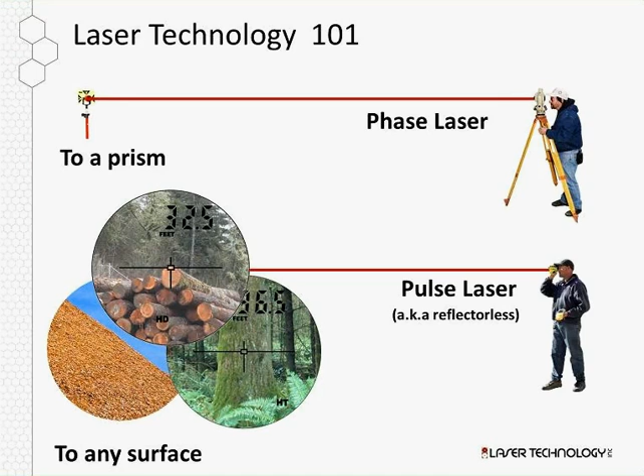We incorporate this in our laser rangefinders. We've got a distance sensor built in and a tilt sensor in a TruPulse 200 model here. The distance sensor measures that slope distance or line of sight distance. And the tilt sensor measures the inclination or tilt of the unit itself. With those 2 values, we're able to calculate the vertical distance and the horizontal distance that's used mainly in mapping applications.

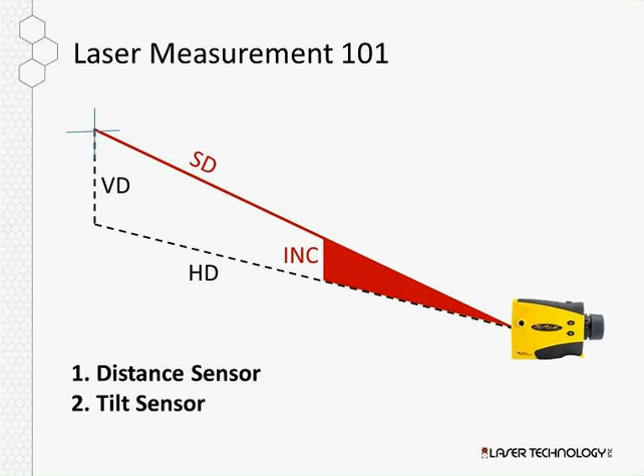Taking it a step further, we incorporated a compass sensor along with those other 2 sensors, the distance sensor and tilt sensor. The compass sensor works off of magnetic north, and so with those 3 values, we're able to get the slope distance, inclination, and azimuth or bearing values, so we're able to calculate that XYZ value.

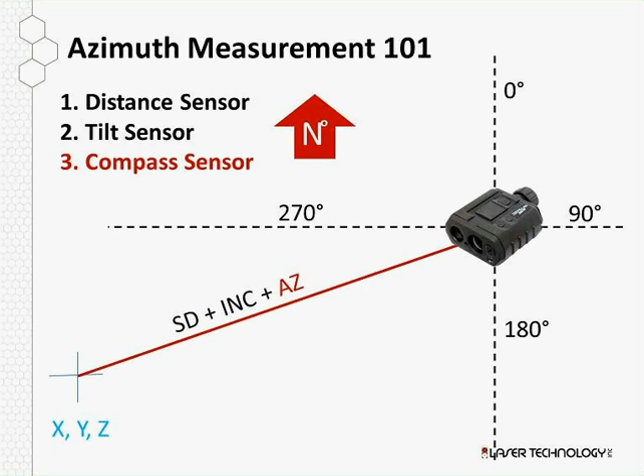In case you encounter magnetic interference or work around heavy machinery, a compass can be compromised. So we developed a horizontal angle sensor, the TruAngle. Now, taking our TruPulse 200 that measures slope distance and inclination, the horizontal angle sensor will measure the turned angle. You've got to establish a 0 reference. So taking the values of slope distance, inclination, and the angle value, we're able to calculate the X, Y, Z coordinates of your object.

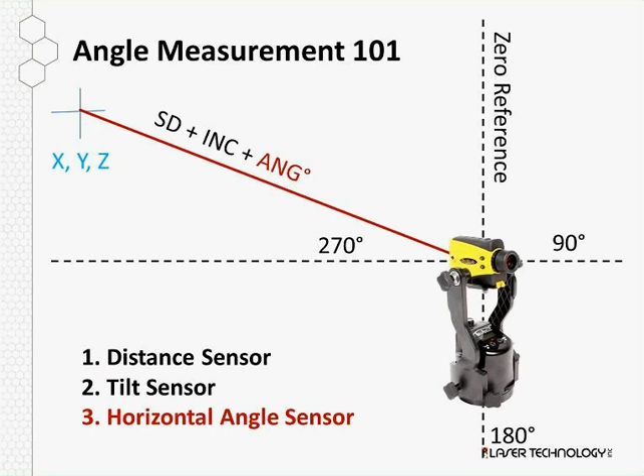Scott, could you talk a little bit more about Juniper Systems itself? Absolutely. The parent company of Juniper Systems is Campbell Scientific, and you may recognize them. They're one of the top manufacturers of stationary data loggers and data acquisition systems. In the late 80s, one of the Campbell brothers, Ron Campbell, branched out and started making rugged handheld computers. One of our first customers was actually a log scaling type customer, and we officially took on the name of Juniper Systems in 1993.

And Juniper Systems conjures up some images. Most people, when they think of Juniper Systems, they think of some of the videos we've made showing handhelds being shot from slingshots or dropped off roofs or thrown into lakes, even put under a truck or sealed in concrete. That's really our specialty, making the world's most rugged and professional industrial-grade handhelds.

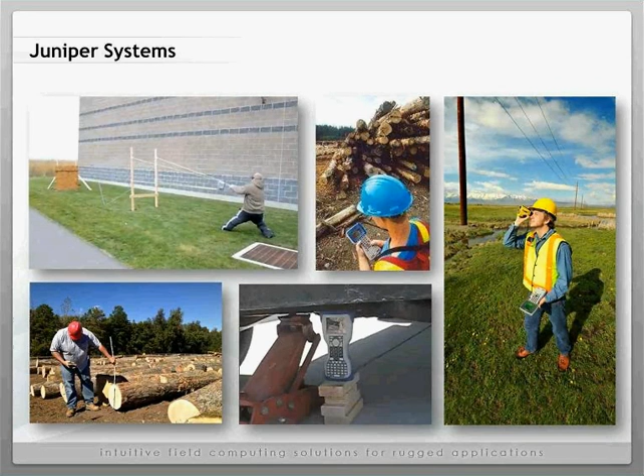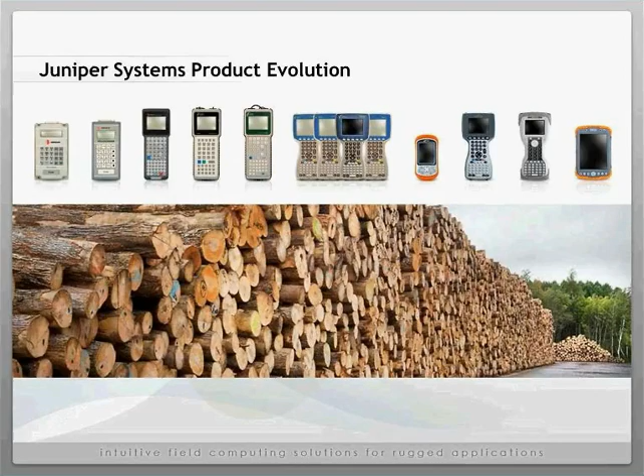This kind of shows the product evolution. Our products have changed a little bit in the last 20 years, and what's interesting is how many of the previous products are still going strong in the field. This is our current product line. Each handheld caters to different preferences, but they follow the same theme of being rugged and reliable, and they're each waterproof, dustproof. They're built to perform optimally in real world conditions, and each will work seamlessly with Laser Technology products.

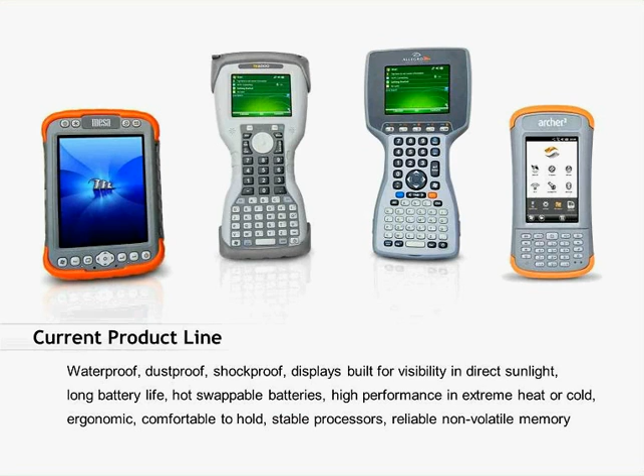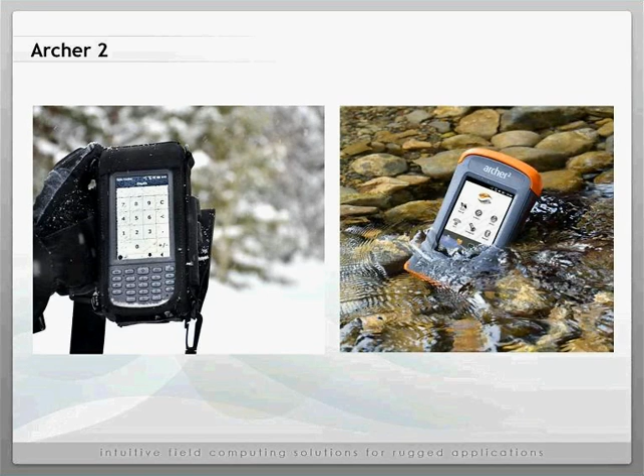So the Archer 2, like other Juniper Systems products, offers maximum data protection. It's got the IP68 rating, MIL standards, so it's going to be waterproof, dustproof, built to endure and perform in any conditions. The display is the first thing that grabs people's attention. We took the best screen available and used a special optical bonding process together with chemically strengthened glass, and the result is a screen that's virtually scratch-proof. It has incredible brightness in any conditions.

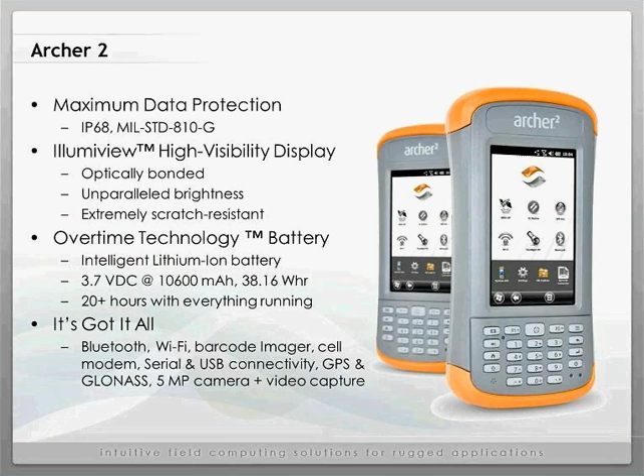And along with that, the battery power is outstanding. It has a lithium-ion battery that's 2.5 times more powerful than our previous products. So with the screen at full brightness and other power-hungry applications like GPS going, it'll go for 20 hours, no problem. And lastly, it's got it all, because there's a wide variety of configuration options available for the Archer 2. I also wanted to comment that Juniper Systems and Laser Technology have been used hand in hand for a long time, and the products complement each other very well.

Well, thanks, Scott. And John, how did you get involved with Juniper Systems and also Laser Technology? Well, log decks are so large and misunderstood that it's difficult for folks to get involved. I discovered there was really a limited number of folks willing to step into this adventure. I didn't supply this slide, but it happens to be Weyerhaeuser Longview, where my wife and I first started our scaling career in 1976. When I left the Scaling Bureau and went to work for Simpson Lumber, we had our crane issues up in Tacoma.

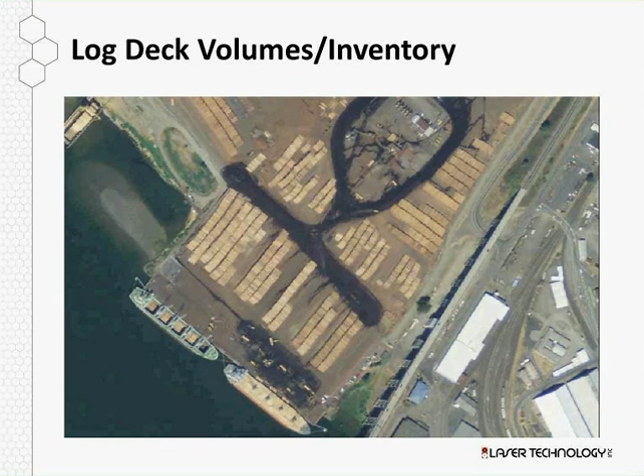Next slide. We were trying to figure out the best method to measure these high decks, and the problem was getting around in between the decks. This top slide shows a dramatic squeeze to emphasize how difficult this was, a technique I also used for my log quality pictures. But my first experience with laser tech was actually on a crane in Tacoma. The old method was measuring log decks with a 50-foot pole, but the decks were 55 feet high. It was impossible to do this on a regular basis, so it was only really done at audit time.

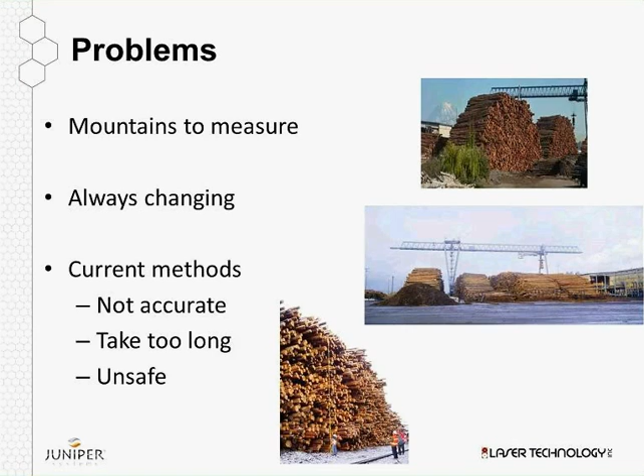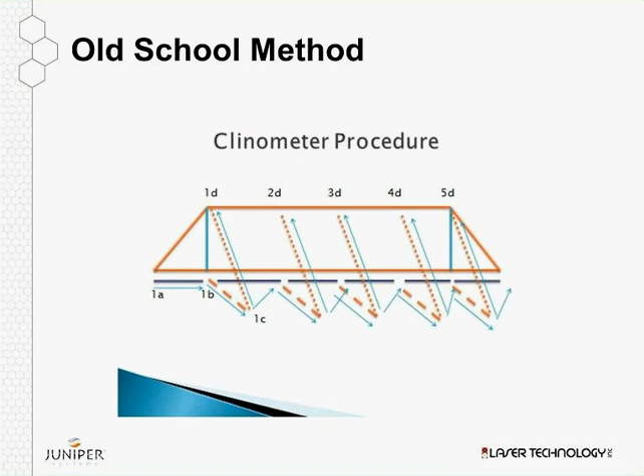So the method I came up with was something we all learned back in forestry school, using a clinometer with a 50-foot Spencer tape. We developed a procedure so one person could walk down a log deck, take shots, and get a higher degree of accuracy. The problem was that after all the measurements, only half the work was done, and with the inaccessibility of many of the decks, after spending so much time to get the best information you could, you were ending up guessing at many of the other log decks.

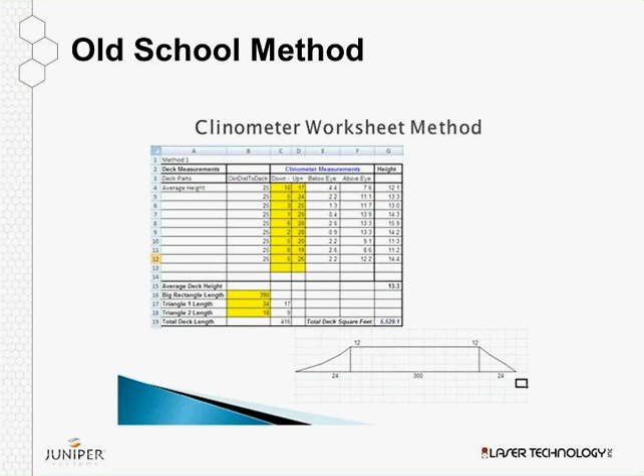So the goal was, because of my experience of riding our crane with a TruPulse 200 tethered to a scaling computer, I had gained the knowledge at least to ask the right questions and went on a letter writing campaign. Laser Tech came through with the programming of the log deck software, which I enjoyed immensely working with these folks and their programmers. And Juniper had the scaling computer that I needed for my check scaling, which just happens to have become the kind of standard de facto here in the Northwest for all the scalers. Just about everybody's holding one of these devices.

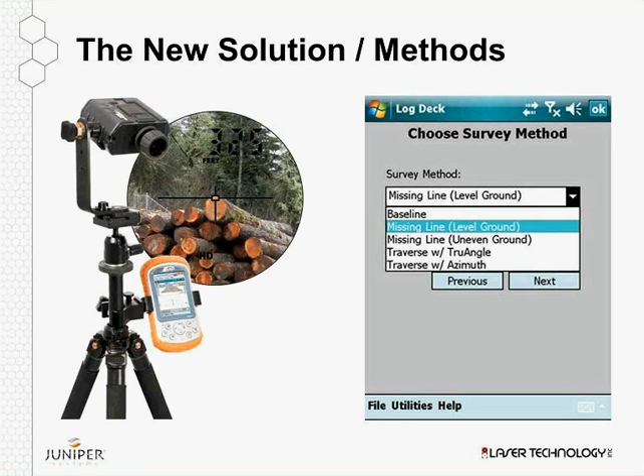Yeah, so working with you, John, we wanted to make sure we capitalize on all the goals and your procedures that you had out in the field, and so we developed a software solution called Log Deck Volume. And again, listening to the customers and the issues you've seen out in the field, we wanted to develop a simple way to collect the data with our laser rangefinder on top of a Juniper Systems product. So we developed 5 different mapping methods. You have all different types of applications or environments in the field, so we developed these 5 different mapping methods.

This first method is the baseline method. That's more of a simple method. A user is going to set up an origin, maybe set a cone, the traffic cone there at one end of the log deck, away from the deck. And what you're going to do is you're going to work along parallel the length of the log deck using the laser rangefinder and the software. And you start to walk along that baseline until you see a break or a peak and valley of the deck itself, the top of the deck.

And you take a measurement to the origin, then you're going to take a measurement to the top of the deck. Then you're going to move to the next break or valley. You take a measurement to the origin and take a measurement back to the top of the deck. And you work your way to the length of the deck and take that last measurement back to the origin. The software, as you can see here, there's just a quick screenshot, walks you through everything. So it knows you're taking those measurements correctly, back to the origin and then the top of the deck. It's one of the simple methods using a TruPulse 200 product.

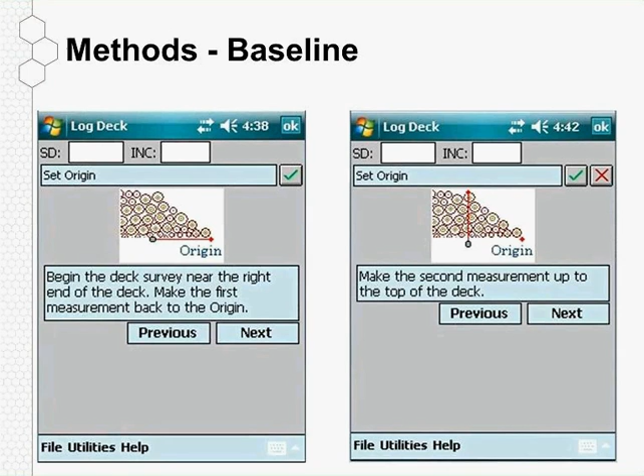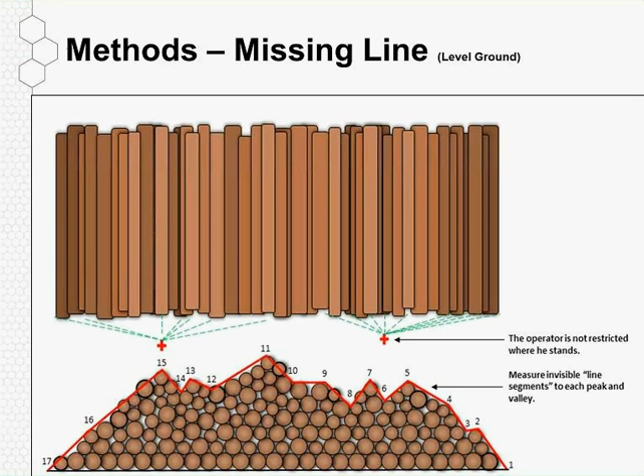The other method we developed is called missing line. We have a routine in the TruPulse 360 product called missing line, where you can take a measurement to 2 remote points, and it'll calculate that line segment between those 2 remote points. And this is if you're on level ground. You establish a position safe away from the deck, and you're going to use the TruPulse 360 in the missing line method. You take a measurement, so we're doing these little line segments from 1 to 2, 2 to 3, 3 to 4, and the software will capture all those different line segments. Again, you can see it drawn, the quick diagram here, and the software walks you through there, taking those missing line segments.

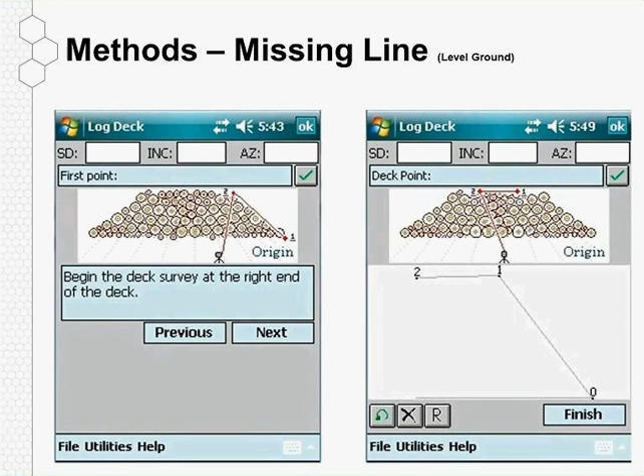That's if you're on level ground. We all know a lot of mill yards and areas aren't on even ground or level ground, so we needed to develop a procedure for uneven ground. This still utilizes the TruPulse 360 product and that missing line method I was talking about. A next step is taking that missing line segment. You're going to go from 1 to 2, and then you're going to need to take a missing line segment from 2 to the base.

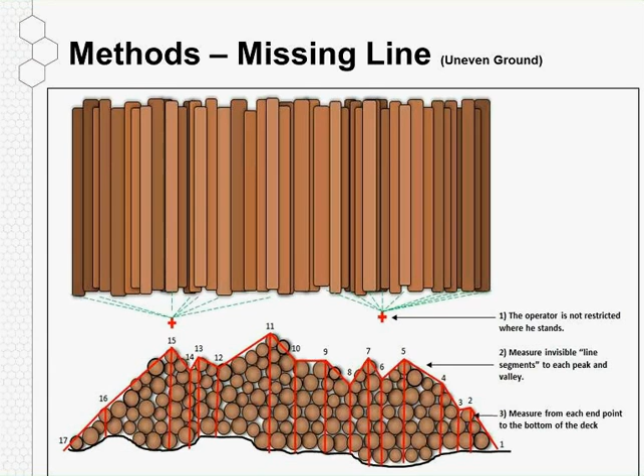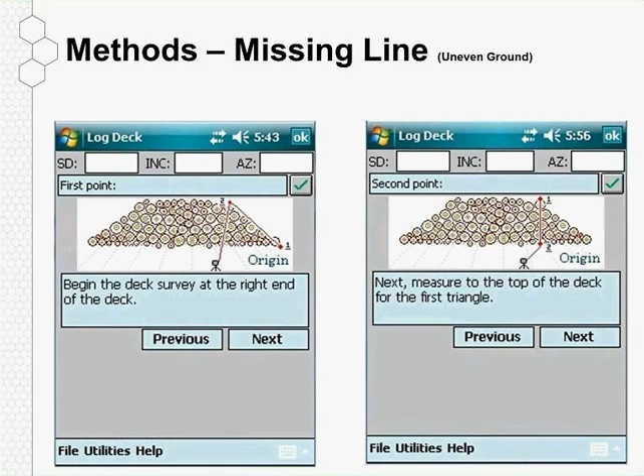You need to be aware of where you're taking those measurements, to the top of the deck and to the base of the deck. And then you're going to take your next measurement line segments from point number 2 to point number 3, and then from 3 to the ground. And you continue this along the deck, getting all the peaks and valleys of the log deck, and work your way to the other end of the log deck. The software, quick screenshot showing you the next steps, what you need to do, taking measurements from the origin to the first peak or valley, and then taking from that top portion of the deck to the base.

The next method is traverse with encoder. It's where there might be some magnetic interference. The last method I showed was using a TruPulse 360 where it's got the compass built in, but you might have a lot of machinery or an area where there might be some magnetic interference out in the field. That's where you're going to use this method with the encoder.

You're going to use a TruPulse 200 that measures that slope distance and inclination, and you're going to use the TruAngle where it does the turned angles. It does not work off of magnetic north. So you're going to take the equipment and set up a nice safe location away from the log deck. You don't have to be at the end of it; you can be right in the middle of that log deck. Just position yourself here.

And this is where you're going to take just the measurements to those peaks and valleys. All you're going to do is take a laser measurement, and you're going to get that slope distance, inclination, and that angle measurement to point number 1. Then you continue to point number 2, 3, 4, etc. And if you need to move to make sure you acquire all the points along the log deck, you might need to traverse or move that control point. Well, this method allows you to do that.

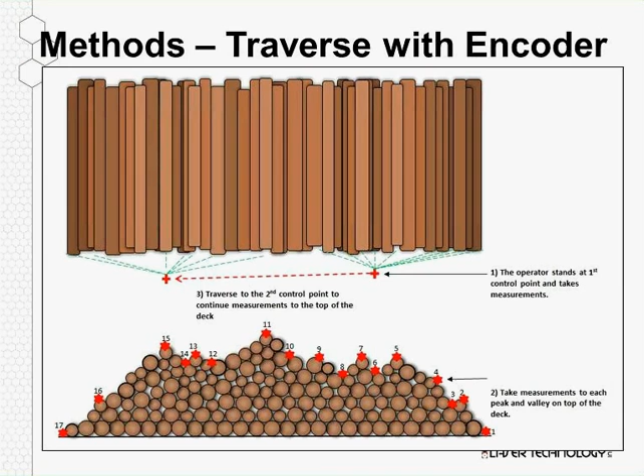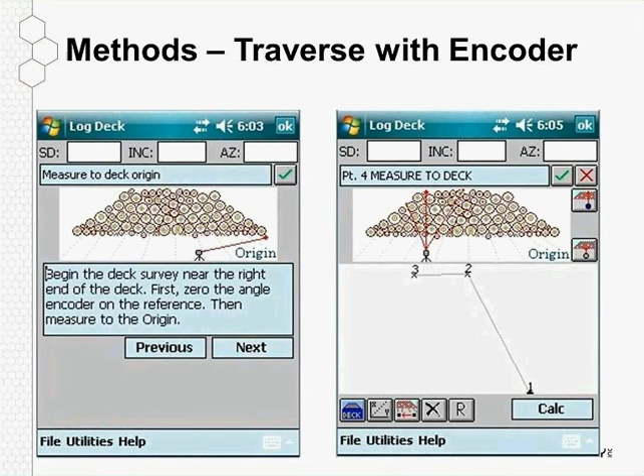You set up a traffic cone along the length of the deck, and then you just take a measurement to that cone, move the equipment to that area, which is your new control point, and you continue taking those measurements to the top peaks and valleys of the deck, finishing off 12, 13, all the way to 17. Again, the software walks you through everything, gives you a little diagram. You can see if you've missed a shot or a measurement went above the log deck, it'll populate here. You can delete that shot. So it draws that diagram right on the data collector for you.

Another method is traverse with azimuth. Again, we're going to use the TruPulse 360 with the compass that's giving you that azimuth value. Same type of procedure as the traverse with encoder, but you're just using the TruPulse 360. Establish a control point, nice and safe away from the deck, and you're going to take those measurements to the peaks and valleys. If you need to traverse along the log deck, you can go ahead and take a measurement to a new control point, move to that control point, and finish off those points at 15, 16, and 17.

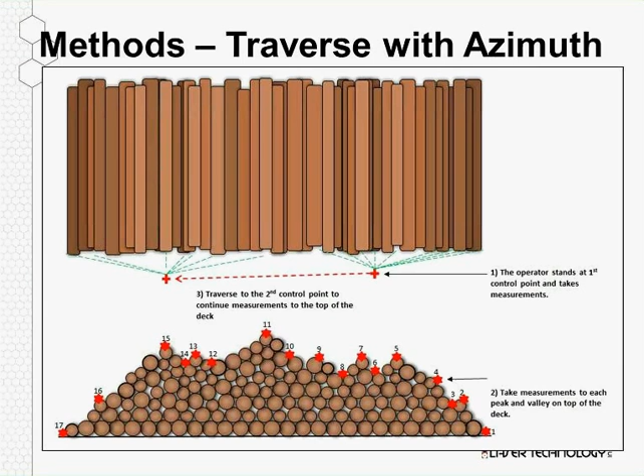And that's if you're on level ground. Not everywhere these decks are stacked is on level ground. So we had to come up with a procedure to do on uneven ground. This is using the traverse with azimuth value, and you set up a position, and you're going to take one extra step. This is where you need to be aware of what the software does. Within the software, you're going to need to activate the top button.

You're going to take measurements to the top, those peaks and valleys. Make sure that top button is activated, and take those measurements 1 through 10. And then you're going to tap the bottom base button, make sure that's activated. Then you're going to take those measurements to the base. Basically, what we're doing is a profile of the base also. You're doing a profile of the top, those peaks and valleys, and you've got to do the same to the base to establish that base ground.

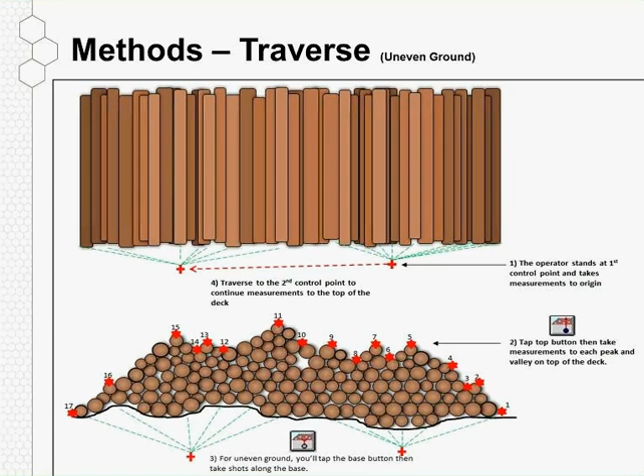If you need to traverse, you're able to do that, move down along the log deck with the traverse button, and continue to take those top measurements to the peaks and valleys, and then also at the base. Establish those two profiles. The software, you can see, just walks you through there and draws up that diagram. And one thing to note is the traverse target height. If you're traversing, the software populates that as a traverse target height.

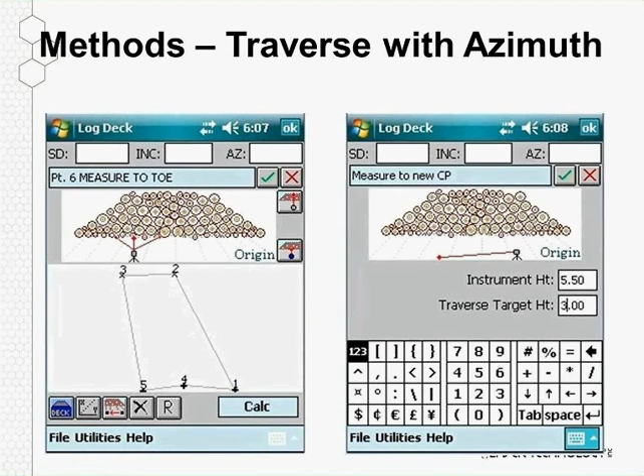So John, I know you work with this stuff out in the field a lot more than I do. I was wondering if you can share your expertise using the software and your best practices. Well, Derek, thank you. It's obvious to anybody listening to this that these folks know exactly what they're doing with their equipment to be able to explain it like Derek did.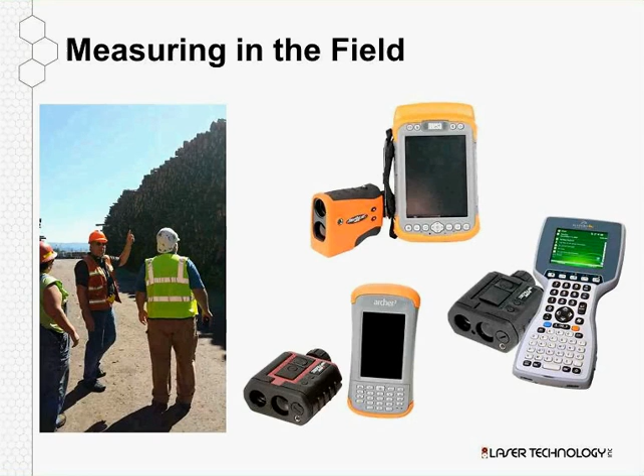The one thing that I wanted to do is make sure that it was as portable as necessary. And I explained to the group that on the top of a log deck, since we look at these all the time, each one of those logs has a name. We can point to one log on the top of a deck, and we can traverse down the deck and come back and start again. So that's precisely what they were able to do for me to get this set up with this software.

And the software is very easy to use. They've created a very easy menu system. You start with a new job, and I always created a date, and I did this on a weekly basis at all 5 of our sawmills. And so there's one of our log yards there. I picked a species,

and then they gave me the ability to put in a grade and a sort, and then you begin to measure the deck by setting the origin, and they even have a backstop set up so that if you're trying to shoot down to a flat end on a deck because it has a backstop or is up against a bank or a wall, it lines up correctly for you.

What I use is the TruePulse 360 with my Allegro handheld scaling computer, and this is what the screen looks like. And I have it set in traverse with azimuth mode, and the instrument height, I'm 6 foot tall, so my eye is 5.5 from the ground, and so that sets the instrument height, and I'm getting ready to shoot this deck.

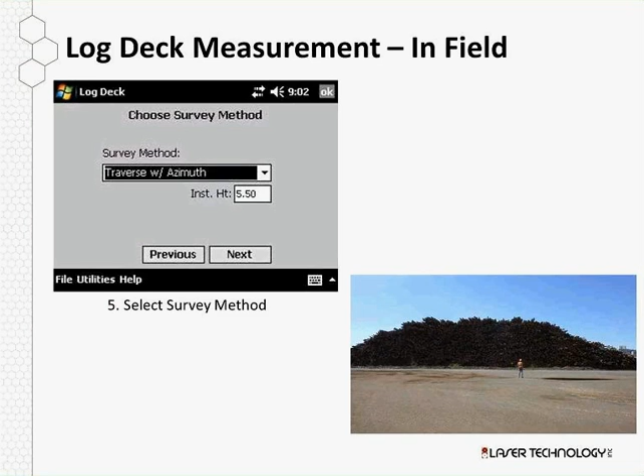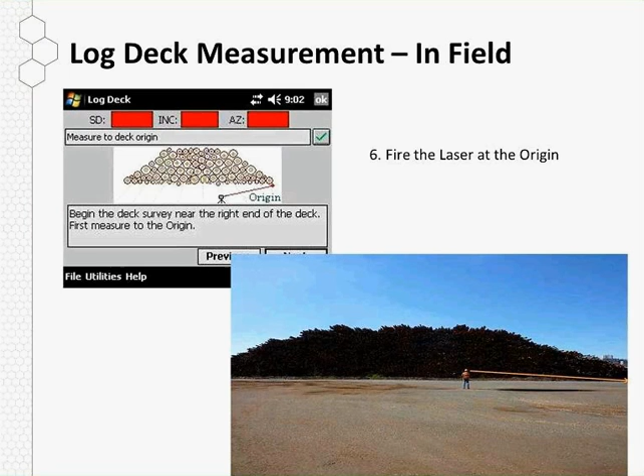As I take my beginning shot on the origin side, the picture is a little bit squashed. This deck is actually 50 feet high and about 350 feet long. It has about 1 million board foot Scribner. So I'm probably 100 feet, maybe 150 feet back from the deck. I can see the entire deck, the top and the bottom. So this is a pretty good deck to stand in one spot and take all my shots.

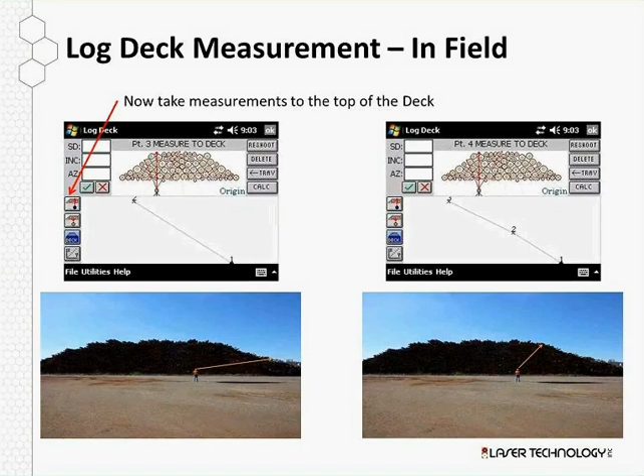As I work my way across the top of the deck, I look for valleys and peaks and obvious areas that I need to take my shots into. And it builds a profile with the software on screen so that if you happen to miss a deck and shoot the deck behind it, that deck's going to be higher and you'll see a spike, and you can very easily back that poor shot out.

And also you can work in either direction to fill in any gaps or hills or valleys that you intended and thought you might have missed. So it doesn't matter which direction you take these shots. And then I continued all the way down to my last deck shot. Yeah, that's important, John. Like you mentioned, as you take that last shot to the left, you can come back and take some more measurements. The software allows you to do that.

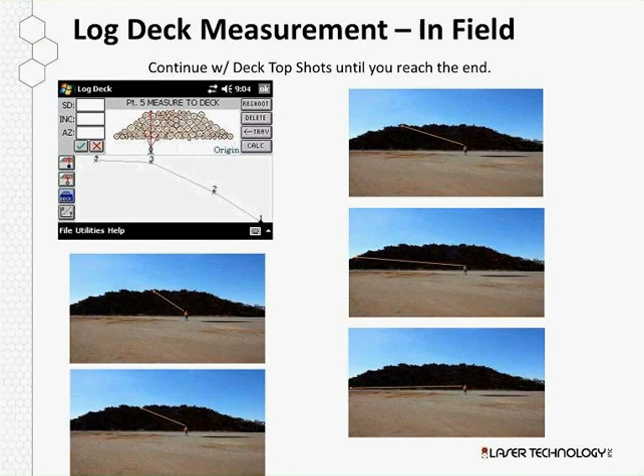Then, as you can see, all you have to do to get the full profile of the deck is there's a little button. It's a toe shot button. It's the second button down on the left-hand side, and that sets it so that you can take all your bottom shots. Now, normally the decks are on ground. They're not necessarily level. They're sloped. So they might be 2 feet higher than you on one end and 2 feet below you on the other end for drainage.

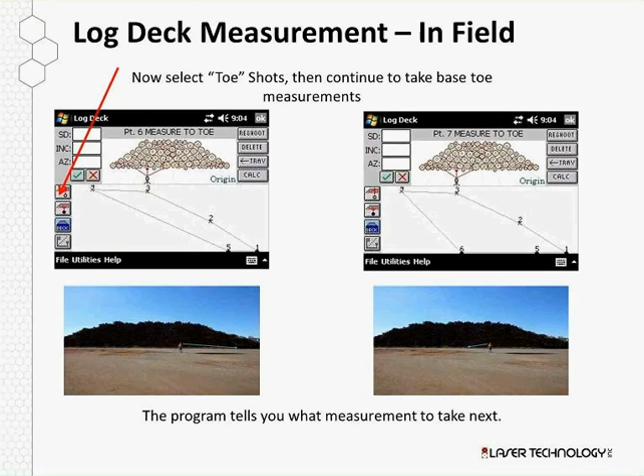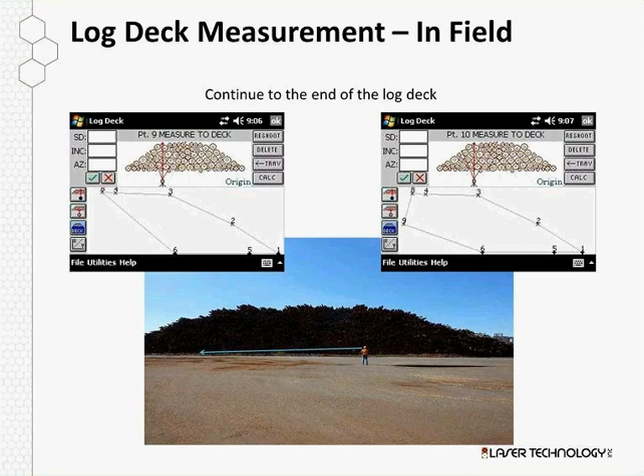So I always take shots, no matter how flat I think they are, using the method here, and it helps keep the accuracy of these decks. So I'm able to take all the toe shots. And as you can see, as you take the shots across the bottom, it takes that, one of my old bosses liked to call it string theory, and stretches that right out so that you can get the right volumes in there. This works very, very slick.

And in the end, you end up with a profile of the deck, and you can double check your shots. You can always back one out and replace any. And then you can look right down and hit your calc button, and what you end up with is the length of the deck on the bottom, and you end up with the square foot area. And you have the ability to put a log length and a constant in.

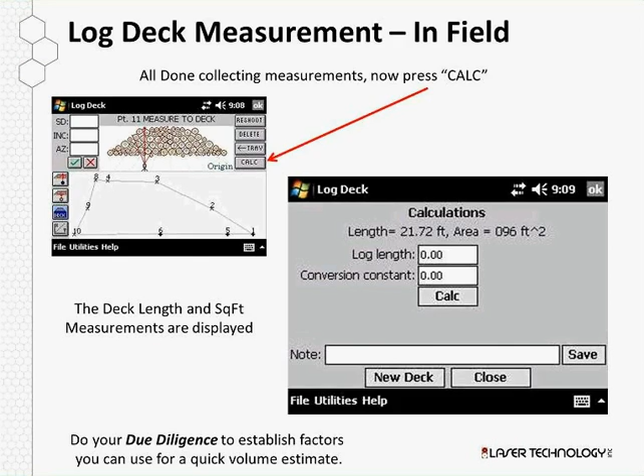One of the things I tell everyone is make sure you do your due diligence, because not everybody's numbers work with how the decks are being organized. But Scribner is every 3.125 feet is 1 square foot of Scribner log length, and so you can use that as a constant in most cases.

And when you come away from your log deck, do your due diligence on this and make sure that you understand how your decks are being built, you'll come up with some very, very respectable numbers that are very easy to repeat. And I have the experience of seeing the numbers that came from our crane and replicating them with the numbers that come from standing there and taking those very same shots with a handheld. And most of the time, they're within a half of 1% difference.

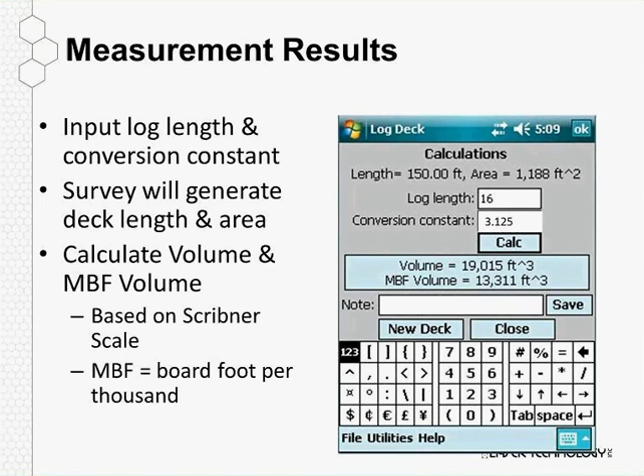And so on this screen, you're showing all the calculations you've got there, and you can save these files, save the results in a text format or even a CSV format or Excel, so you can take that to the appropriate people. You just hit the Save button there. It saves all that information, all the data that you collected, all the points, raw data, and all the calculated values.

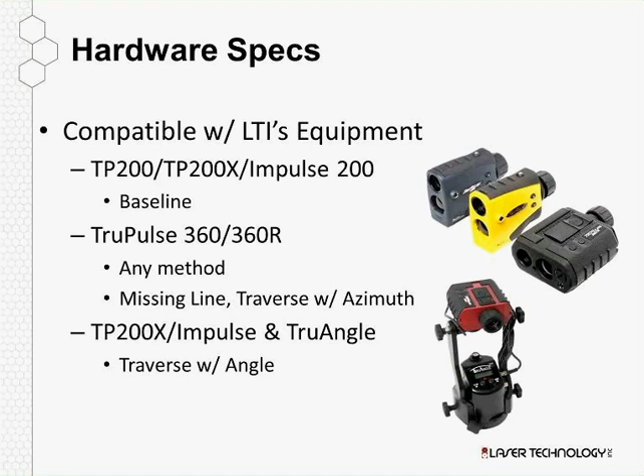Here's just a quick glance at the laser rangefinders and the mapping method that they can be used in. TruPulse 200 models that measure slope distance and inclination are used in that simple method called baseline. A TruPulse 360 that measures slope distance, inclination, and your azimuth value, you can use it in any method besides the traverse with angle. For the traverse with angle method, you're going to use a TruPulse 200 and the TruAngle product, if you're working around large machinery, or there might be magnetic interference that could affect the compass accuracy.

The software specifications. Our software works on Windows Mobile devices, Windows Mobile 6.0 and newer. We've been working on both QVGA and VGA display screens, portrait or landscape, such as the Archer and the Juniper. And the PC program is used to install the software onto these devices.

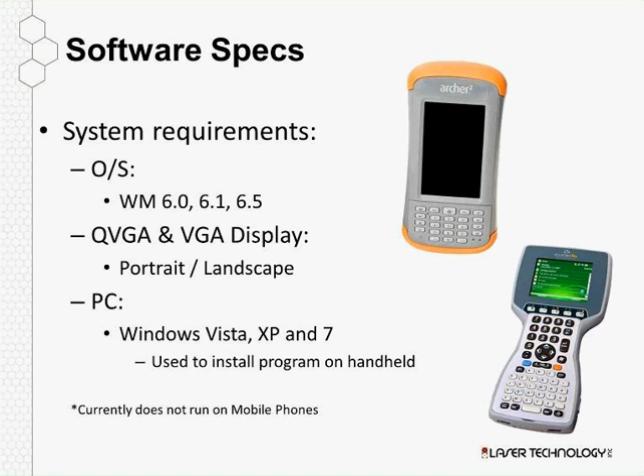Thanks, Jerry. I'm going to go ahead and ask some questions here. One of those questions that came through, I think it's more directed to John. John, how long did it take to measure that scenario that was just shown? I think you mentioned that million board feet. How long did that take? About as long as it took me to explain it.

I've had people who have never touched a scaling computer or the TruPulse, and I was able to hand that to them, show them the screen. It takes about 7 taps to get you down to the menu that you need to start taking your shots, and each shot takes about 1.6 seconds. So it doesn't take very long to move right along the top. It's very easy to sight through the 7-power scope and see your log. It's very easy to use it where you're looking in advance of where you're going to take your next shot. There's no difficulty at all. If you can see it, you can measure it.

There's no question. As far as the distance, I've measured as far as a quarter mile away with this thing repeatedly and come up with the same answer. But as far as log decks, we have some log decks that are 600 feet long, and to walk down and traverse them and shoot to a point on the deck that's recognizable, I have no difficulty at all walking those at a very brisk pace, especially the ones that have the channels and waterways and alligators growing between all the submerged areas between log decks. Now, we don't have alligators in Washington, but we might as well have with the inability to get in there.